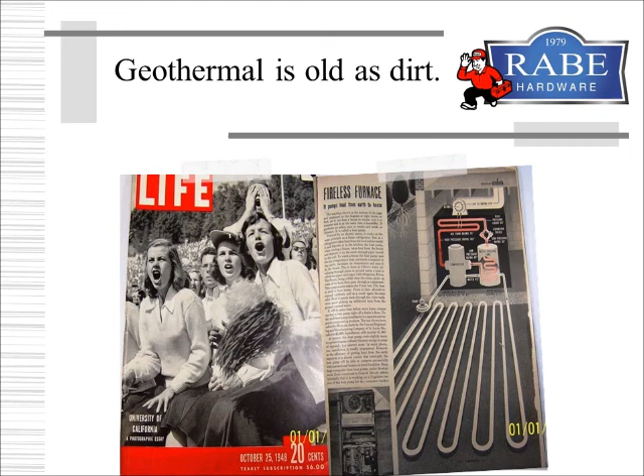It's new technology, but it really isn't. It's been around. It was on the cover of Life magazine in an article clear back from 1948, as far as the concept of utilizing the earth to heat and cool your home. The big thing with geothermal is the efficiency.

When we think about heating a home with electricity, we're like, electricity's kind of expensive, though, right? Well, think of an electric baseboard heater, an electric plug-in heater. How you rate electrical appliances is what they refer to as COP, or coefficient of performance. In other words, plug in an electric heater, turn it up, you buy $1 worth of electricity, you burn it through elements, you get $1 worth of heat out of it. It's a 1-to-1 ratio, or 1 COP.

With geothermal, we're seeing COPs clear up to 5. In other words, 500% efficient. For every $1 of electricity we buy, we're getting $5 worth of work or heat out of it. Neat stuff. We don't have a glass ceiling on us like the gas furnaces of today. I'm a Lennox dealer as well. Our highest efficiency gas furnace today is 98.2% efficient.

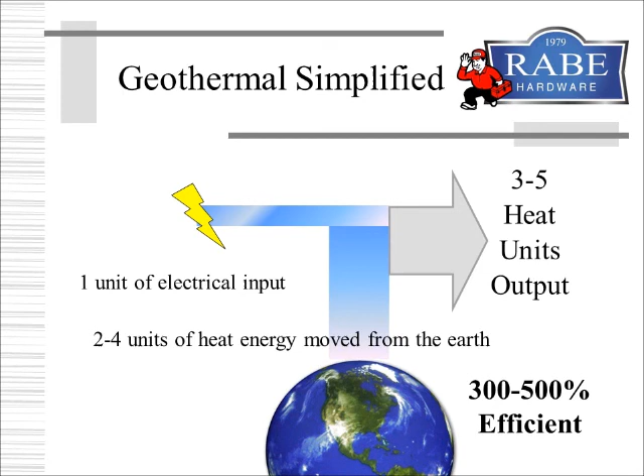We'll never get to 100. We'll never go beyond 100 like this is. Why? Because you're burning fossil fuel and there's always waste. You're always going to have a flue, or flue gases, that need to go outside the home. The old way. The old gas furnace, right?

I ain't saying that it's 100% out there yet, but we've seen an increase in geothermal installations really starting to take off and really boom. A lot of it has to do with the tax credits, which we'll get into briefly too. But the new way is geothermal, guys, and why it makes sense is just it's so efficient.

I mean, you take your average 2,000 square foot ranch home, ask your folks, they're spending $300, $400, $500 a month. I can heat and provide hot water in the same home for generally less than $500 a year with geothermal. So, neat stuff.

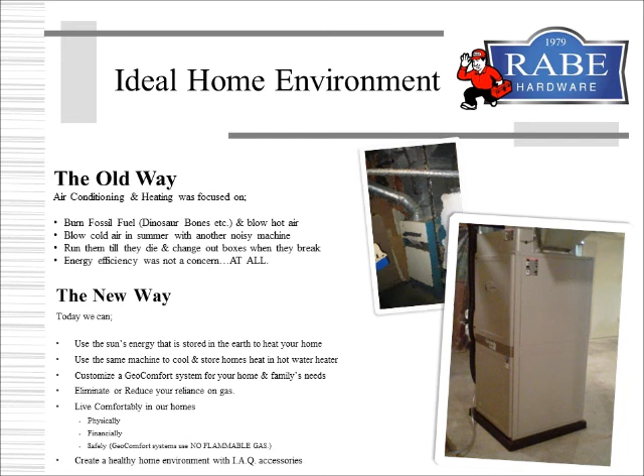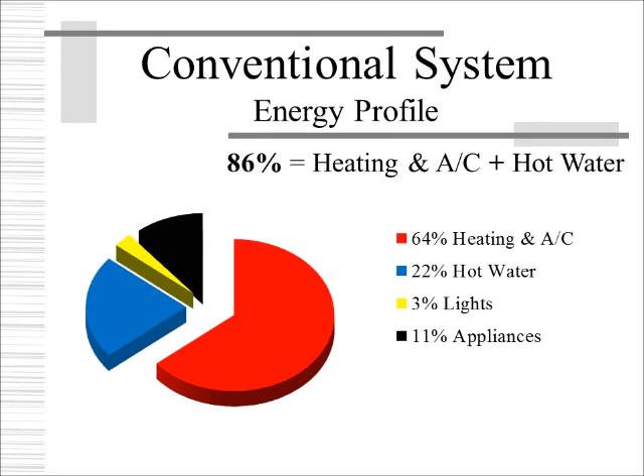Conventional system, 64% plus your hot water. So you've got 86% of a home's energy use is heating, cooling, and heating hot water. 3% lights, 11% appliances. With geothermal, we cut that clear down to 35% for your heating, cooling, and hot water demand.

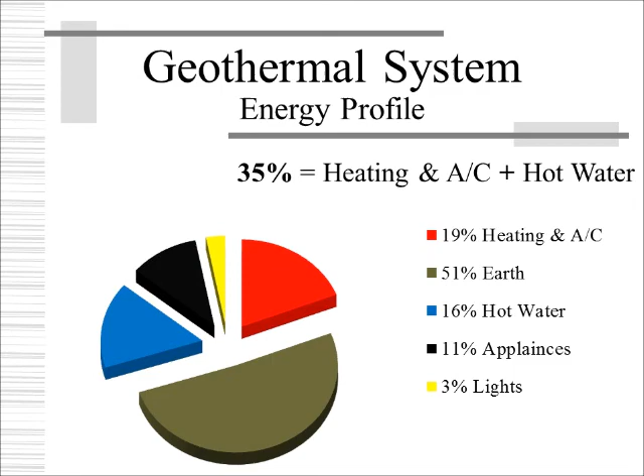Clear down to 19% heating and cooling, 16% hot water, and of course you're always going to have your appliances and your lights, which are even getting more efficient. But this is really where to make the investment into a home, is geothermal.

Geothermal is nothing new. It's the ability of Mother Nature to maintain a constant temperature underground. And all we're doing with geothermal is putting these plastic pipes in the earth. We'll talk about loops real quick here, but we're putting these series of pipes in, whether it's vertical, horizontal, or pond loops, and what's in these pipes is just 75% water that's constantly recycled.

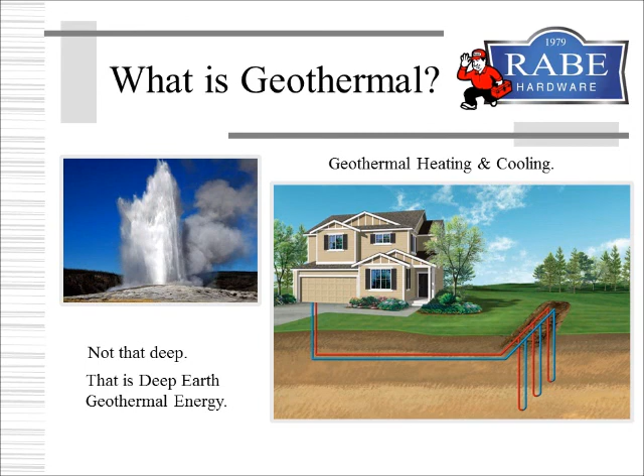It never needs changing. The water that we put in a system is going to be there 50 years from now. And 25% propylene glycol, which is a food grade antifreeze additive. Why food grade? Well, how long does it take pipe to deteriorate? 1,000 years, 10,000 years. We don't want to contaminate water sources. That's why we utilize a food grade antifreeze in there.

Loops, we'll talk about them. There's several different types of loops. These are headers, loop headers, because what's coming out of the house is 1.25 inches. There's a supply and a return. And what's buried outside is your loop field. This is just two different styles of headers. Pass it around if you want.

But basically, these loops, these series of loops that we put in, we fuse them into these manifolds at 525 degrees. There's no gear clamps, there's no brass fittings, melded together. They become one, they're fused together, okay?

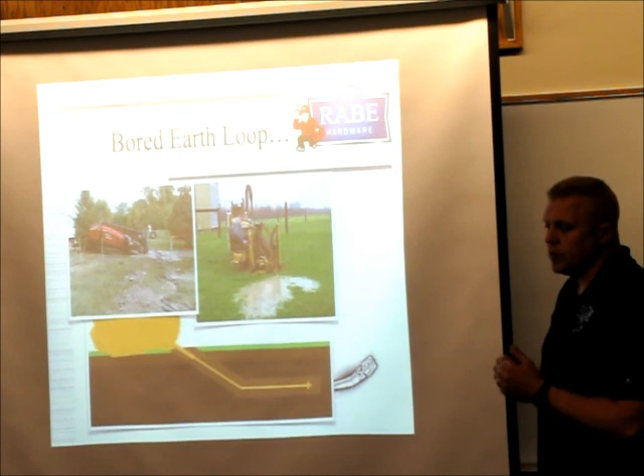So directional boring is a very, very popular method right now because it's the least invasive form of installing a geothermal loop in an existing home. We can have a home over there 100 foot. We can sit here, we can dig a hole that's 3 foot wide, 8 foot long, take our directional boring machine, bore right underneath the foundation of this home, cut a 2 foot by 2 foot hole in the cement floor,

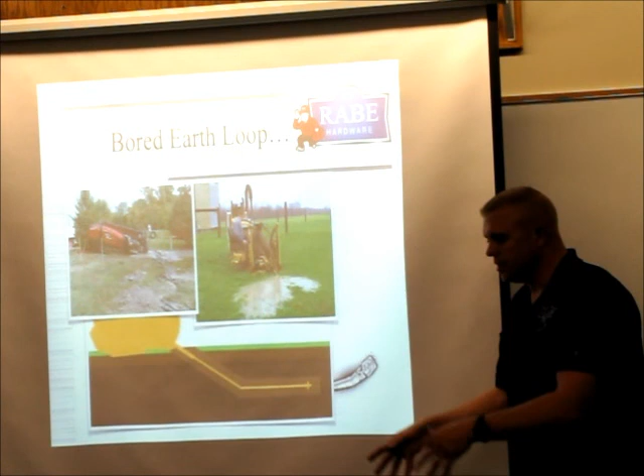hit that hole with our boring machine, pull the 2 1/4" back to our header trench, turn the machine around, put our loops in, do our fusion, and that's all we've tore up in this person's yard. Pretty neat stuff. But this is directional boring to where we directional bore down, plateau off.

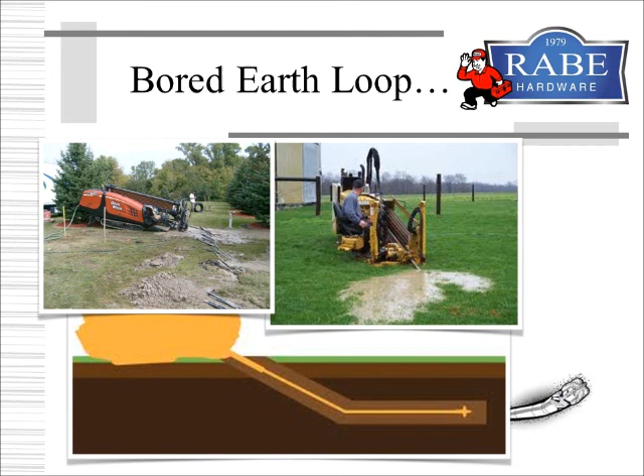These are the loop pipes that we put in the ground. This is 3/4 inch pipe. You can see that there's a U-bend fusion joint right at the end. The water gets down to the end, it turns around, and comes right back. And on this end, it's capped off and filled with dry nitrogen. There's a Schrader valve on here, so that you always know that the pipe you're putting in the ground is perfect.

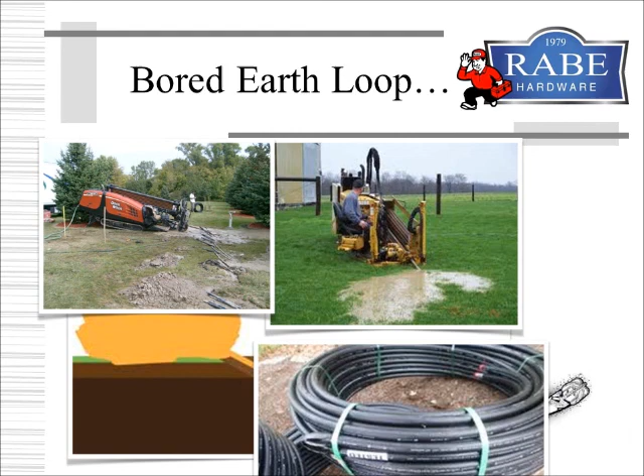Another form of geothermal, when there's not a lot of lot space, tight houses, if people have just a little bit of green space, we can drill down vertically. On a vertical loop field we go straight down, 150 foot to ground. The pipe goes down 150, comes back up 150, so we have 300 foot of pipe per ton. Most of these homes have anywhere from 3 to 6 ton of pipe, or 3 to 6 bore holes, or 3 to 6 directional bore holes. Here again, you can see that U-bend on that pipe. It all comes ready to go underground.

Slinky loops are real popular in new construction because the yard's all tore up anyway, but obviously we're not going to go into somebody's nice lawn and bring in a big excavator and tear the heck out of it. But new construction, we do a lot of this yet. Slinky loop, these are normally 6 to 8 foot in the ground, and it's just like a slinky. It just goes all the way out, and pipe comes back, and then they get fused into them header manifolds that I passed around.

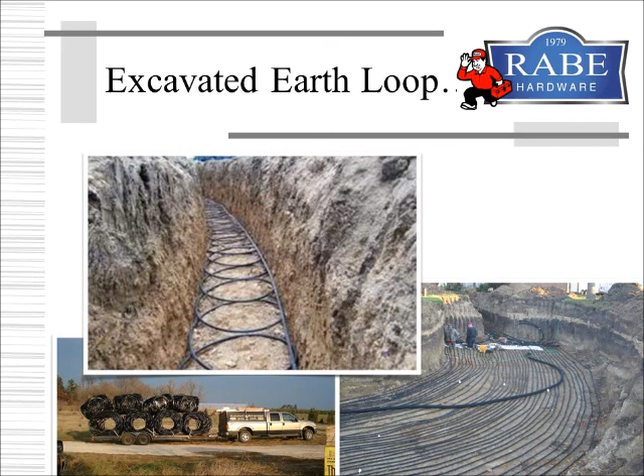And this method here is what they call race tracking, where they dig one big trench out and around, and they put the pipe in the ground, clear around back to the header manifold. Pond loops, we do 2 to 5 of these a year, where we're floating out these same coiled pipes that are tied to a steel mat, float them out, sink them, and that becomes your source of transferring heat.

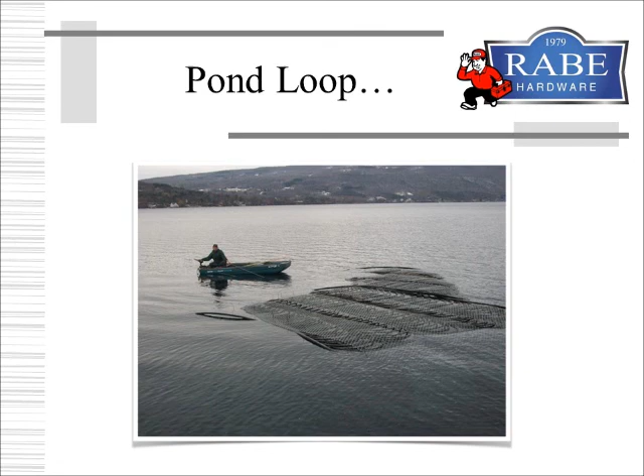See, with geothermal, in the wintertime, we're taking the heat from the earth, bringing it in the home. In the summertime, we're taking the heat from the home, putting it back to the earth. So it's just an endless cycle, season to season. Essentially, geothermal is somewhat solar. If you think about it, the sun heats the earth, 47% is absorbed by the earth. So we can maintain a constant temperature, even when it's -10 outside. Dig a hole 4 foot in the ground, it's 55 degrees. Same way in the summertime, when it's 105 out, it's still 55 degrees down there.

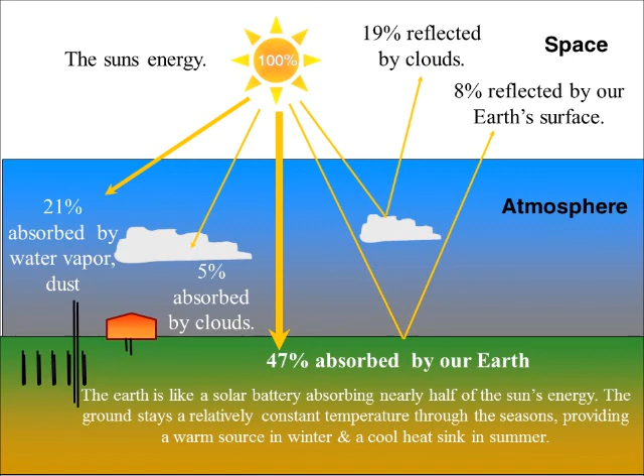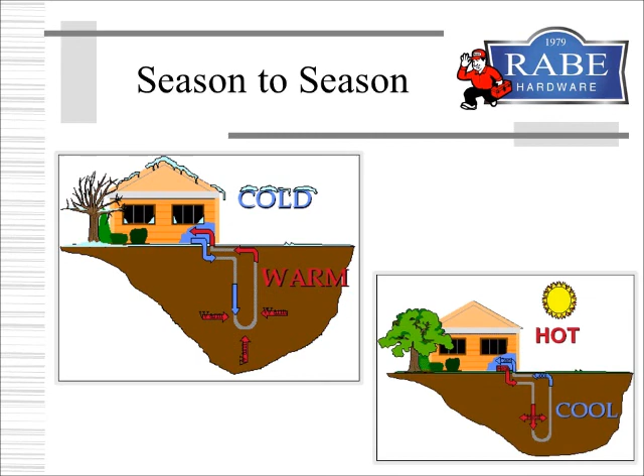$25,000 investment. Right now, the federal tax credit through 2016 is 30% that they'll pay you to do it, or $7,500. We have a brand new state tax credit this year that's good through 2016 as well. It'll pay 6% of the total. And then your utility companies, all your utility companies in Iowa are really up on incentivizing people.

Why? Because they sell electricity. So basically, with Alliant, you get $4,000 from them. Your net investment, you end up spending less than 50% of the total install cost. A brand new furnace and air is going to cost you $9,000, okay? And you're going to heat for a third to an eighth the cost, and cool for less than half the cost, and plus you're heating your hot water. It's really a no-brainer investment if you stop and think about it.

There's several different types of geo units. I'm going to pass this around quick before I get into that. This is really the heart of the, well, really the heart's the loop field that's outside, but inside this is the heartbeat of the geo unit. Basically you have your glycol and water in the inner pipe, and you have your freon flow in the outer pipe. The reason this is rifled or spun in a certain way is we want the turbulence. If this was just smooth, it'd transfer heat just in the outer walls. But with this water really bouncing around in there, we can get maximum heat transfer.

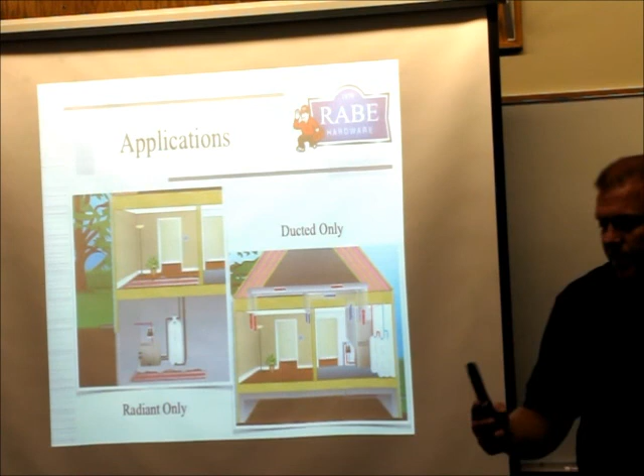There's anywhere from 15 to 25 foot, depending on the size of the system, in the bottom of the geo unit. Yeah, that's what makes a geothermal unit very heavy. That can weigh upwards of 200, 250 pounds. But it's all copper.

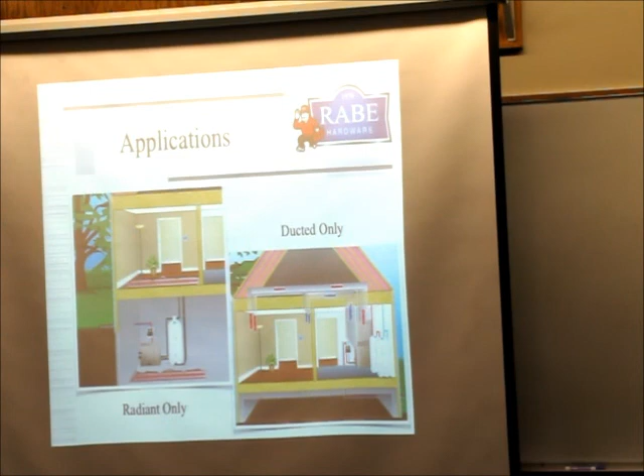As far as geo units, there's several different types of geo units. The most common one is forced air geothermal.

You skipped a slide on me, Jeremy.

There we go. Forced air geothermal, where we take out a conventional gas furnace and air conditioner and put in the geothermal unit. Here's the loop pump that's circulating out to the loop field. The hot water heaters for the home are also tied into the geothermal unit because it can heat up to 70% of your hot water. And you use the same ducting system that you would with the conventional system.

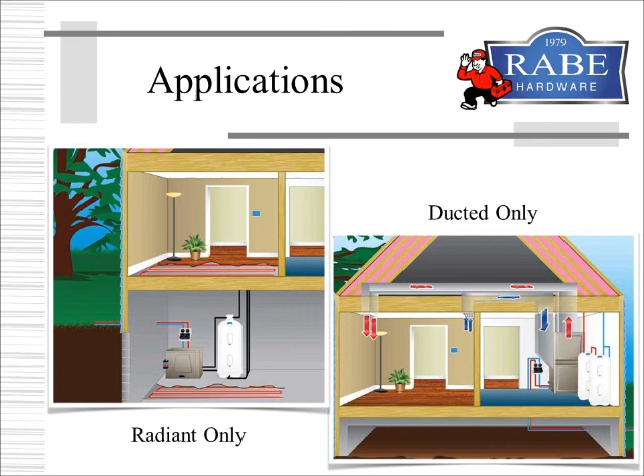Another really popular use of geothermal is what they call water to water. This is considered water to air. You're transferring water to air. Here's water to water. So we have a storage tank, which we're either storing chilled water or heated water, depending on whether we're heating or cooling. We do a lot of radiant in-floor, where we pull off of the stored hot water to do radiant in-floor heating. And in cooling, you can also pull off this tank to do your cooling, as long as you have an air handler with a blower and a hydronic coil in it to take care of all your cooling. There's a couple other systems.